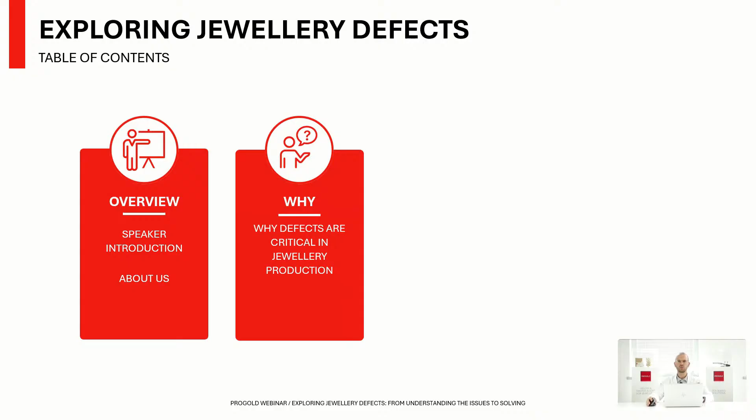Our goal is to explore 4 common defects in the jewelry product, focusing not only on how they appear, but most importantly, why they occur and how they can be understood and prevented through a structured approach. We will begin with a brief introduction about who we are, what we produce, and the value we bring to our customers. Then we will look at why defects represent such a critical aspect in jewelry manufacturing. In the central part, we will analyze 4 selected defects, and finally, we will conclude with key takeaways and an open discussion.

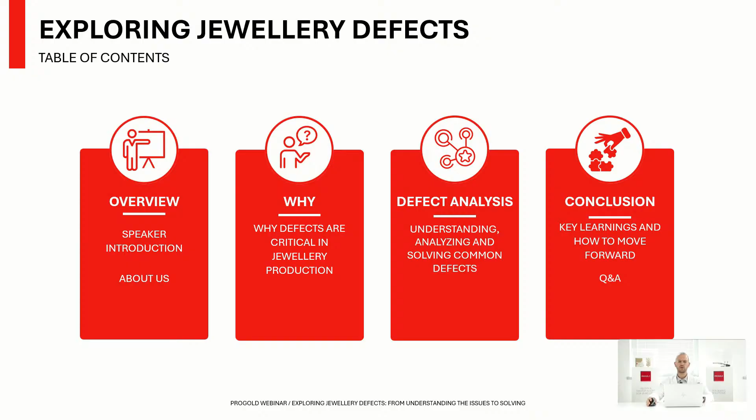My name is Riccardo Cavinato, and I am the Jewelry Metallurgist Manager at Progold. My role, together with my teams, is to support customers in improving their production processes in order to achieve the best performance from the alloys they are working with. This includes identifying production issues, understanding their root causes, and supporting the implementation of long-term solutions.

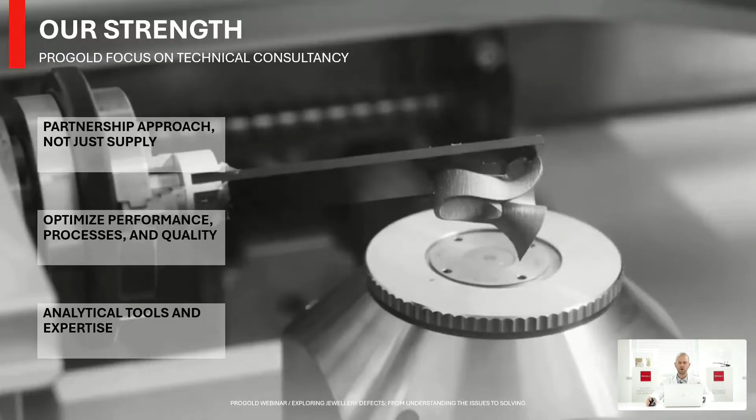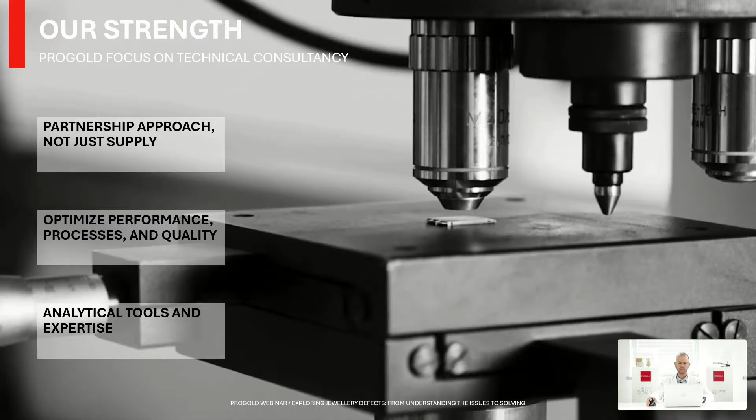But why do defects matter? In the jewelry industry, aesthetic quality is essential. Even a small imperfection can significantly affect the perceived value of a product. However, the impact of an imperfection goes far beyond appearance. Production issues directly influence cost, efficiency, and scrap rates, and very often these challenges are addressed through a trial and error approach, which may lead to a temporary fix, but rarely to a stable solution.

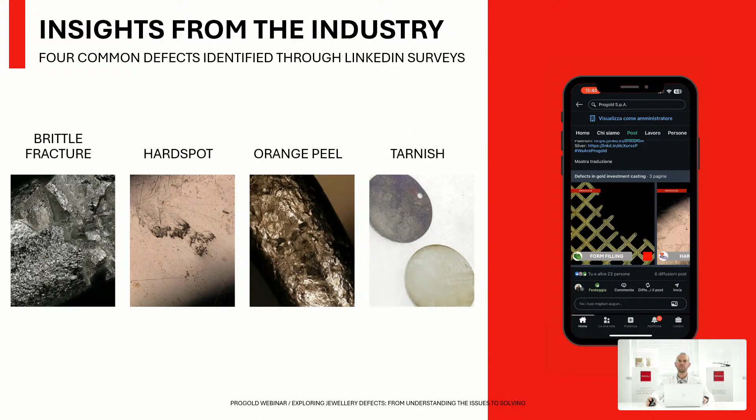The key message here is simple. A defect is a symptom, but not the root cause. Without a clear understanding of its origin, it becomes very difficult to take effective actions. To better understand the real challenges faced by the industry, we engaged directly with professionals through a LinkedIn survey, asking them to identify the most common defects in jewelry manufacturing. The 4 defects we will discuss today were selected based on this interaction, as they represent the most voted and most frequently mentioned topics by industry professionals.

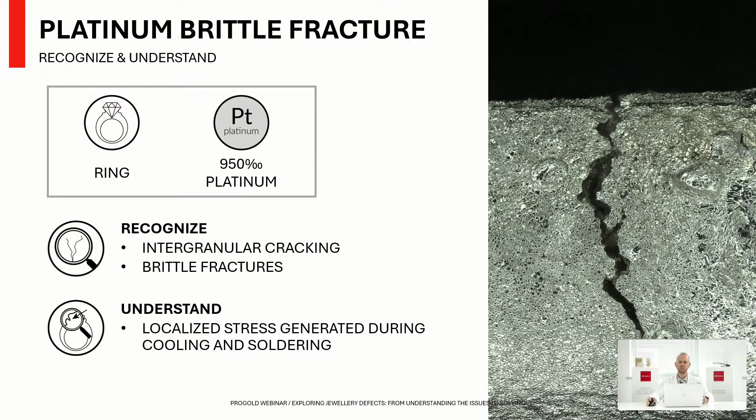The first defect that we will discover today is related to the platinum brittle fracture. In this case, we are going to see a defect on a ring produced in platinum, but this kind of defect could also affect gold and silver products. How to recognize this kind of defect? Typically, the brittle fracture occurs with a morphology of intergranular cracking, and is generally localized in a particular part of the ring where stress generated during cooling or soldering starts the fracture.

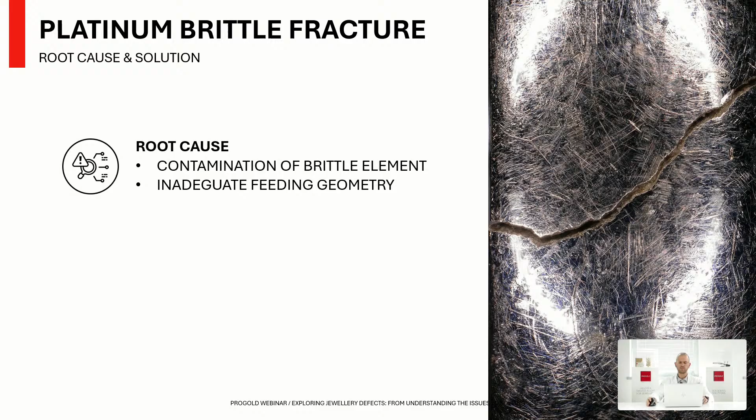What are the main causes of this defect? First of all, contamination by brittle elements could decrease the mechanical resistance of the material. But not only contamination; an inadequate feeding geometry of the model could also cause this kind of issue. How to solve this kind of problem? First of all, the purity of the metal is crucial in order to guarantee the resistance of the material. Contaminating elements like aluminum, silicon, and carbon are dangerous and could derive from contact with the crucible and investment used for the production. But also, in particular in new model designs, an adequate feeding system needs to be studied in order to prevent the localized stress that could lead to cracking.

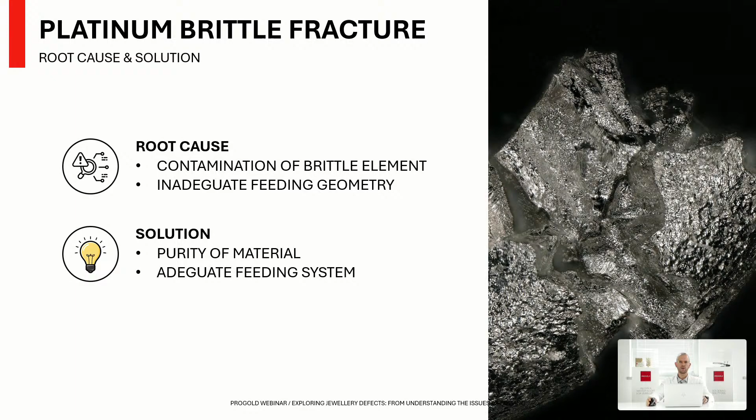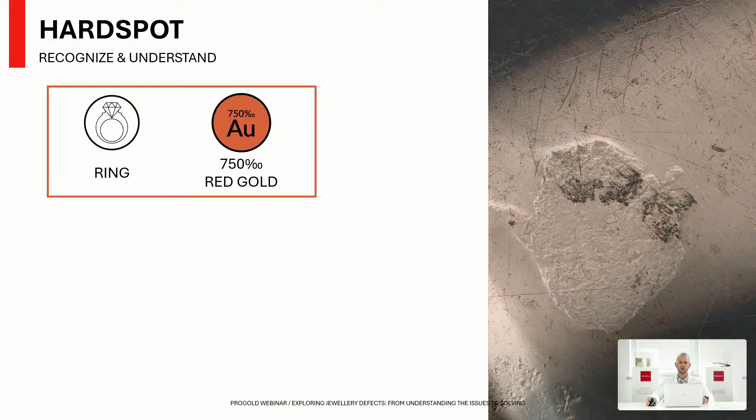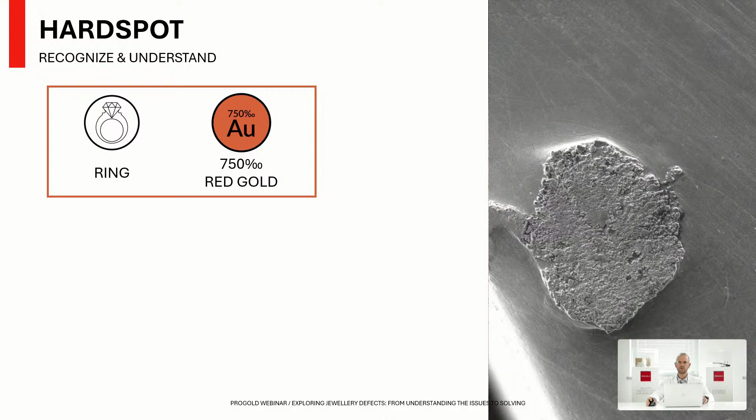The second defect that we will see today is the hard spot. In this case, we will see a defect produced in 18K red gold on a ring from investment casting. But this kind of defect also affects silver alloys and other colors and caratages. How to recognize the hard spot? A hard spot is typically a localized, high hardness inclusion on the surface and in the volume of the item, and it is easily recognizable by the comet-like effect. The critical point of the hard spot is that it appears just in the final part of the production process, after polishing. So just in the final part of the finishing of the item, the hard spot appears.

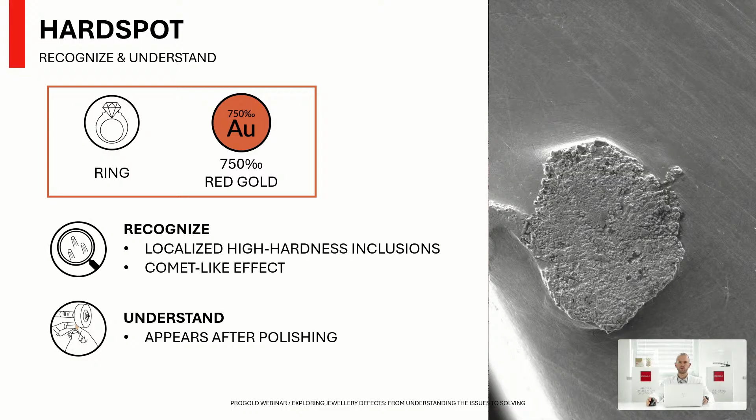Which is the cause of this defect? Mainly, this defect could be generated by an external contamination, generated by the contact of the alloy with other kinds of elements present during the production process. The solution will be to avoid contamination from using dirty scraps that come from different production processes, or using the same crucible for different kinds of alloy. In particular, this kind of issue could derive from alloys that have a different kind of grain refiner inside.

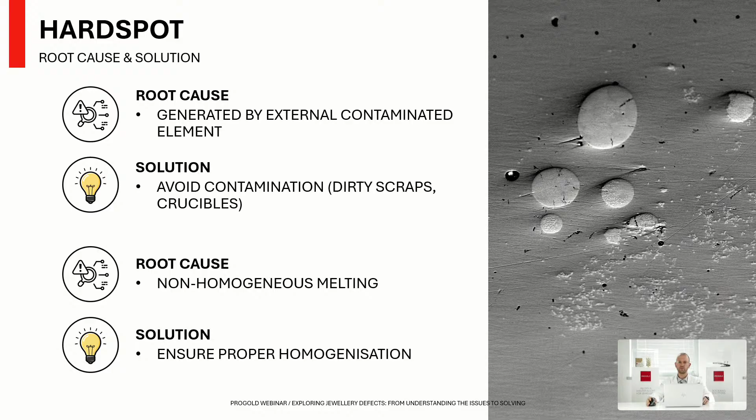Another root cause could be due to non-homogeneous melting. Since the hard spot is generated during the melting and the solidification, it is advisable to use a pre-melting procedure before the casting in order to homogenize the metal as best as possible during the melting. In this situation, and in order to prevent this kind of issue, it is advisable to use a dedicated and developed alloy for both mechanicals and casting.

The third defect that we will see is the orange peel. Orange peel is a defect that regards the plastic deformation process. What we are seeing is a solid chain produced in yellow gold in 10K that shows this typical morphology called orange peel. It's like the surface of the orange fruit, and it affects the quality and the brightness of the mechanicals on the wire and the sheet after annealing and deformation.

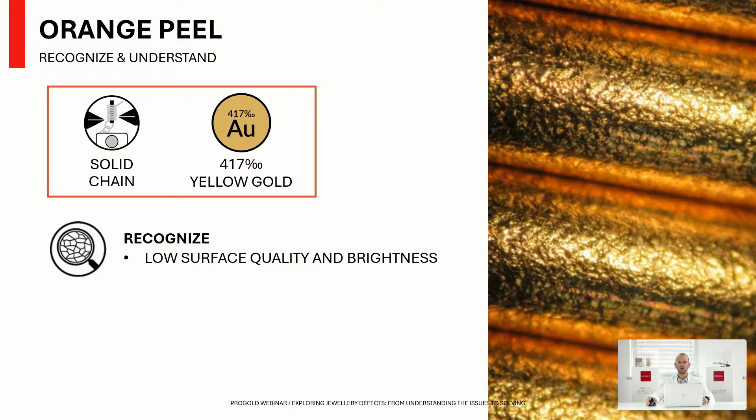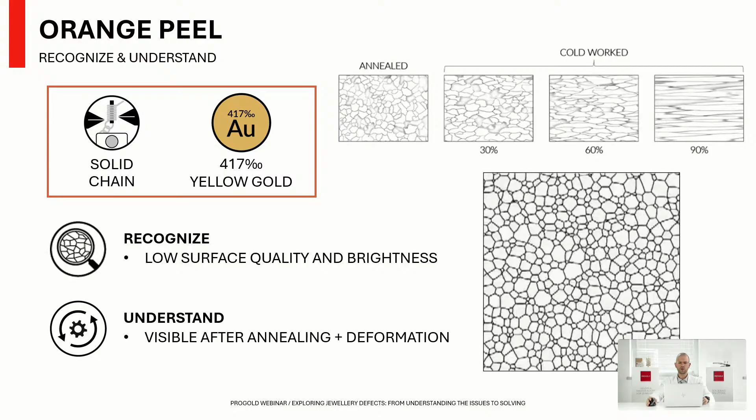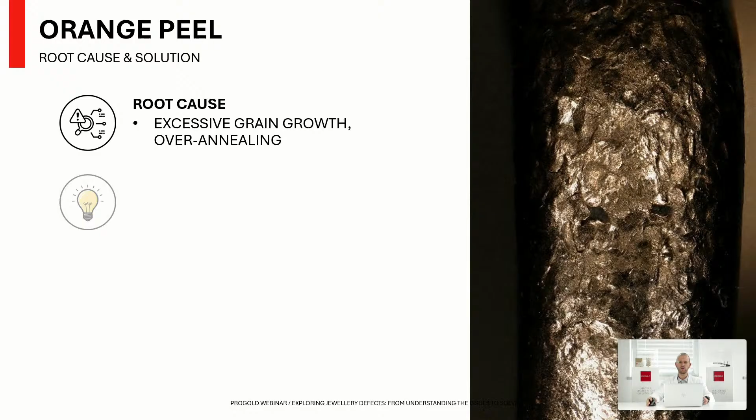This phenomenon appears during the production process of annealing and deformation, and the main cause is over annealing and excessive grain growth during the production process. How to avoid it? The solution is the optimization of the plastic deformation process, and here technical consultancy could help you to solve this kind of problem, because knowing the behavior of the material is the first step in order to not have this kind of imperfection.

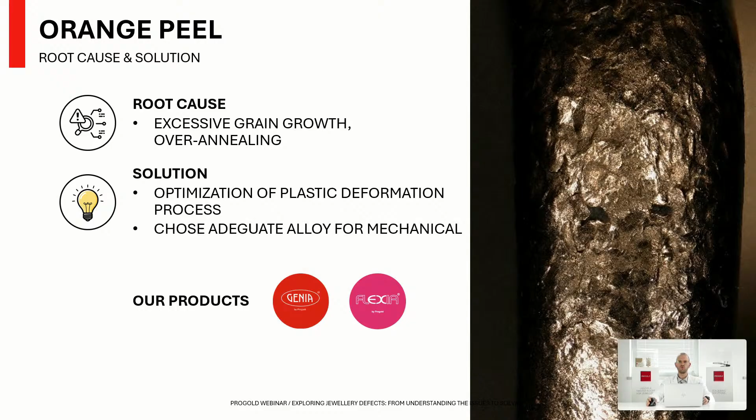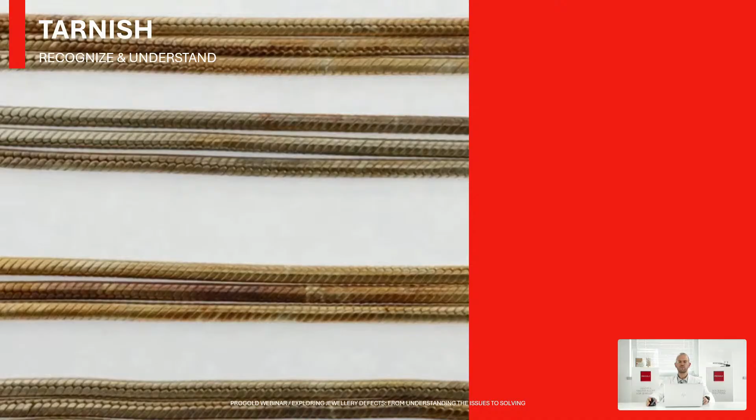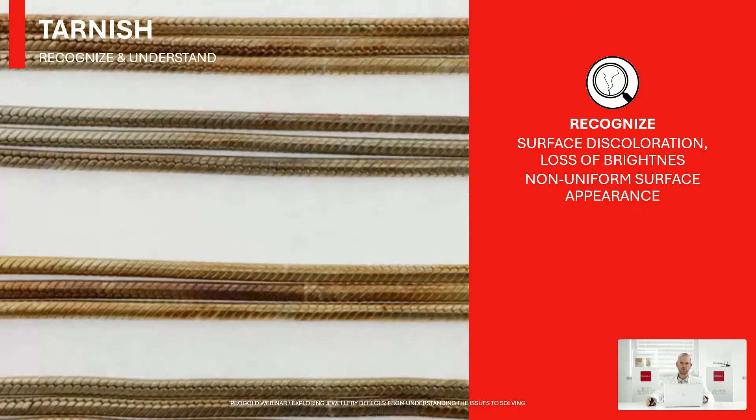The last defect that we will see today is the tarnish defect. Tarnish is a common defect of silver alloys that affects the surface in terms of discoloration and loss of brightness, generating a non-uniform surface appearance. For this kind of defect, it is important to underline that tarnish is the low temperature oxidation of the surface that could occur during the usage and exposure of the item. And here it is important to differentiate the other common defect, firestain, that regards the oxidation of the silver alloy during the solidification. So it's an oxidation at high temperature.

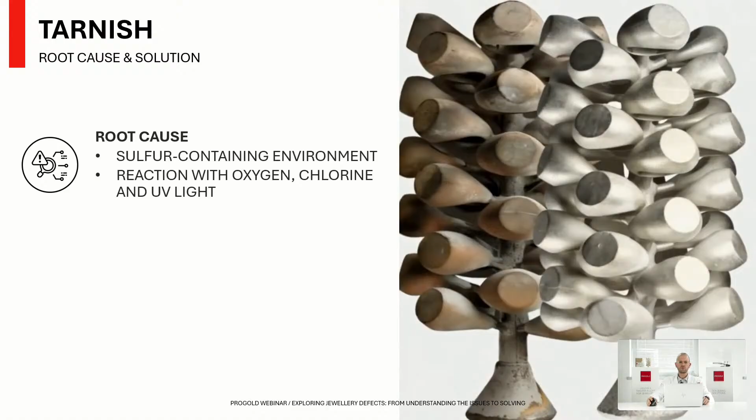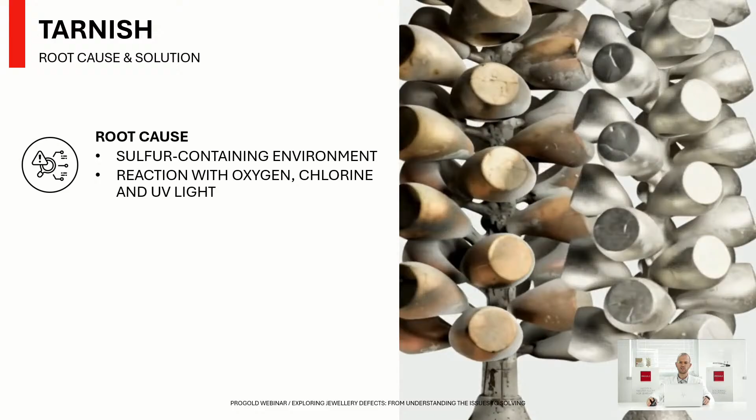Which are the root causes of this defect? Sulfur-containing environments and oxygen in combination with chlorine and UV light could affect the surface of the silver item over a long time. And this kind of defect is something that could be solved with a strictly designed alloy like our Genia 276, which is developed to resist tarnish.

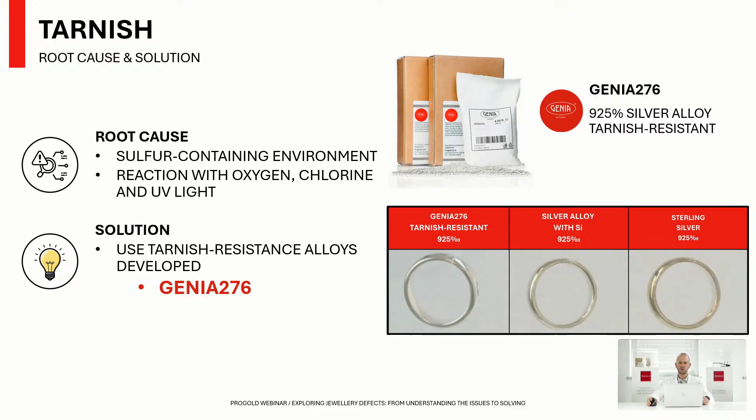So, in conclusion, what can we learn from analyzing these common defects? A structured methodology is what ensures consistent and reliable results. And this is where technical consultancy truly makes the difference. Production issues should not be seen simply as a problem to fix, but as a signal that something within the process needs to be better understood. Identifying the root cause is essential to achieve stable and long-term solutions, supported by both experience and detailed analysis.